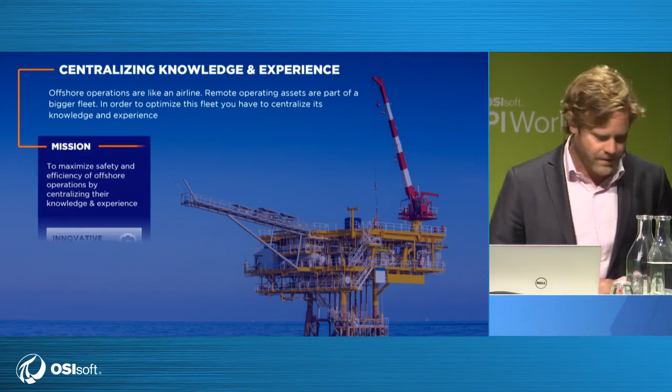A little bit about Rollos. My two other partners have a background in aerospace engineering, and Rollos is actually a family-owned business, third generation, so it's 70 years old.

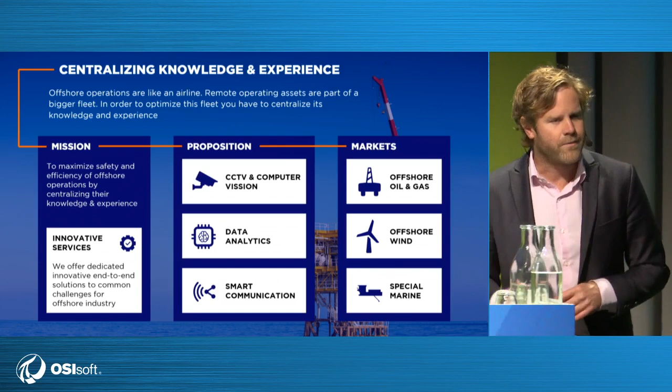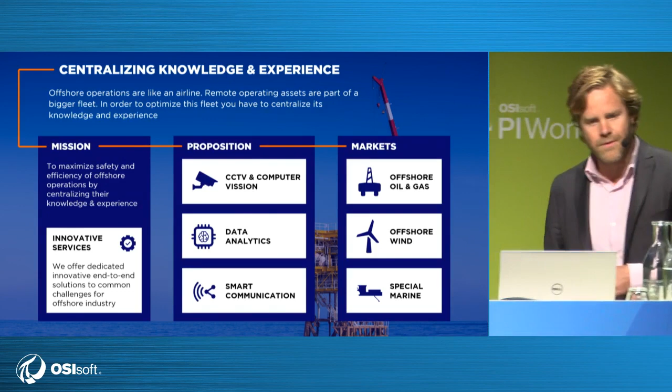And we acquired the company 4 years ago with the intent of buying an installed base. So Rollos traditionally provided CCTV camera systems to offshore drilling contractors. Now, instead of having a startup and innovating in that kind of way with a new product, we bought the company to be able to innovate on top of existing customer relationships and issues that were coming directly from our clients.

So we've evolved into a company that helps people with remote assets manage their central storage and access to data. So we see it as like an airline fleet. If you own a lot of assets that go around, it could be ships, drill rigs, they don't have good data connections to shore. And what we do is all of our solutions are focused around giving an end-to-end solution to help customers actually centralize that knowledge and experience in one place.

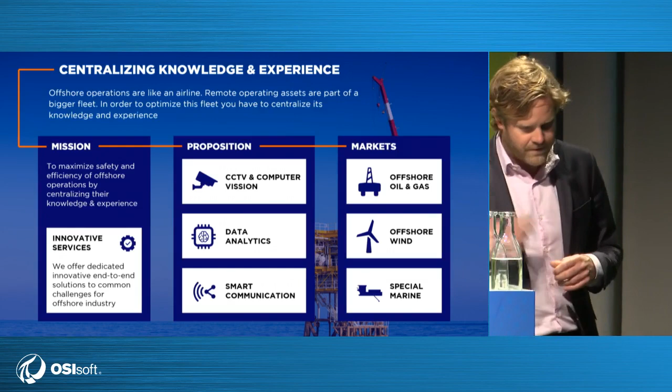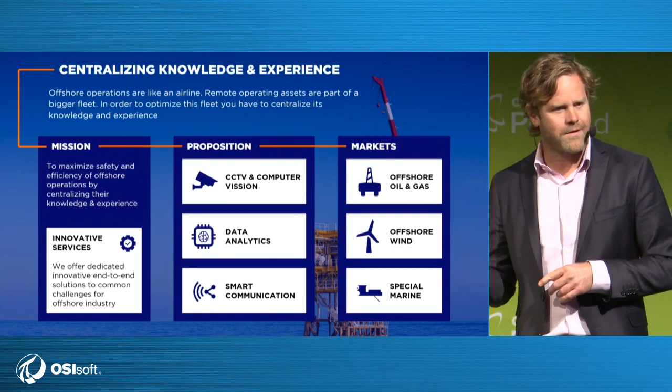So what we've done with the company is still do the CCTV, but for us the CCTV is no longer traditionally cameras, it is a smart sensor. So we add deep learning algorithms, real AI. It's not some simple algorithms, this is a full deep learning stack that can actually do smart things on top of video.

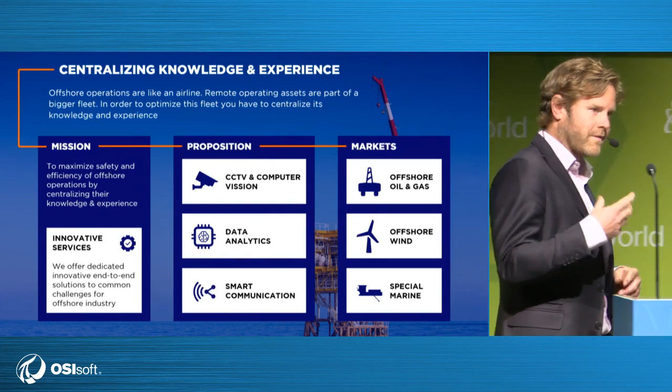And that's the main topic of the product that we're talking about today. That's the first core pillar. The second one is data analytics, and this is how we partner with Pi. We build custom data analytics solutions on top of Pi.

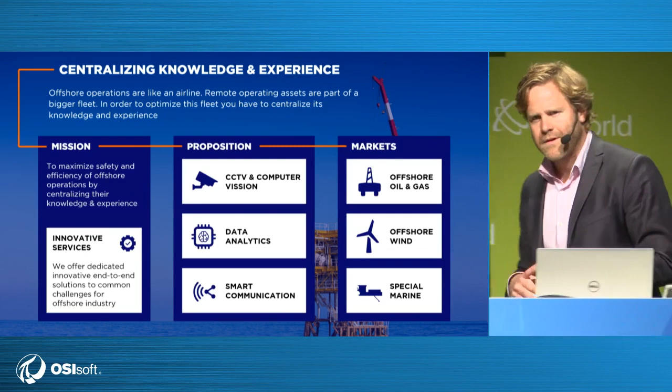So we also combine time series data with documentation. We have a tool that can actually take information from documents and manuals, and if an alert comes out on one of the Pi systems, we can actually tie into the maintenance management systems and have the most relevant documentation to that piece of equipment with the actual time series alerts.

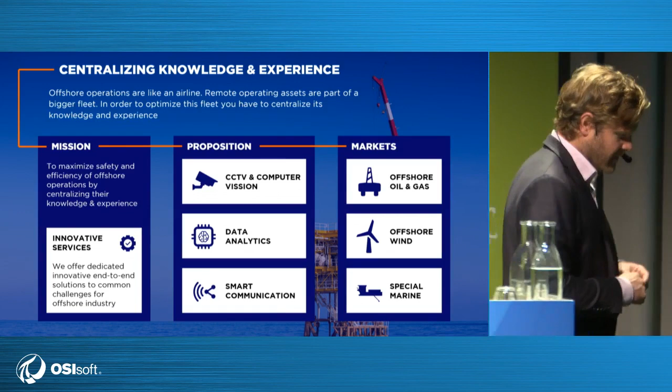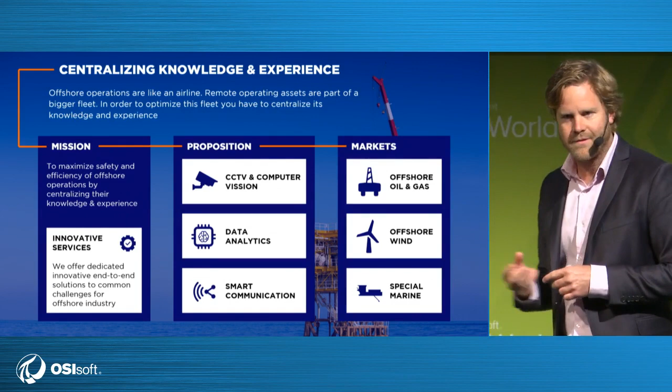And then the last one is, in order to make use of smart technologies, you need full connectivity. Now, on most offshore locations, especially non-new build rigs and vessels, there's no full Wi-Fi. And if you want to put full Wi-Fi on your platform, there's a lot of steel, and it really attenuates your signal from classical Wi-Fi.

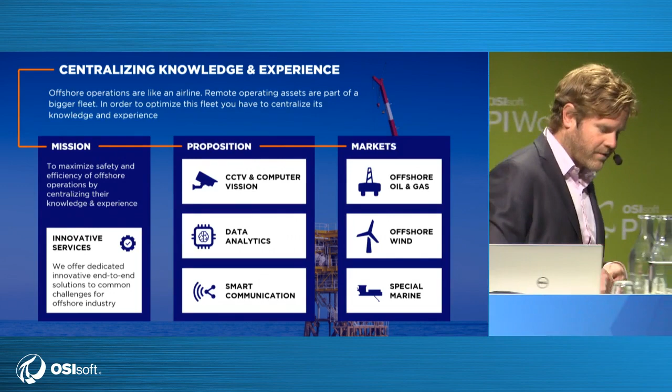So what we do is we set up our own private LTE network. So we've got like a Verizon in a box. We've got a mobile one that we can actually carry around, and we have a full setup for the rig.

And that allows us to tie the other smart solutions we do to really get the people to have that information at the asset, so in the thruster rooms or at the asset on the drill floor. And that's when these technical solutions actually start working, when everybody has access to them on every place of the site.

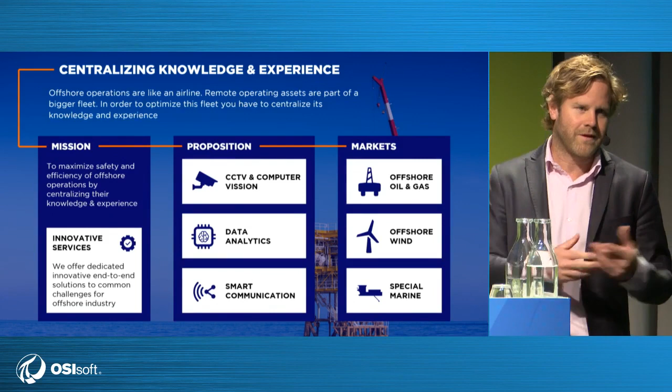We don't do this for all markets. We focus on offshore, oil and gas. Main customers are drilling contractors there, but we deal a lot with oil companies as well. And especially for this solution, we're seeing that drilling contractors and oil companies are actually teaming up to put a system like this in place.

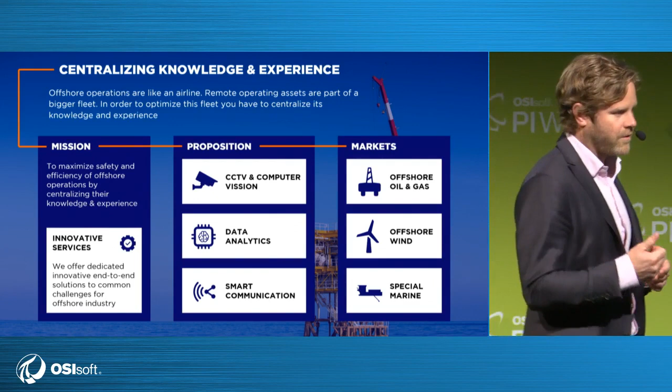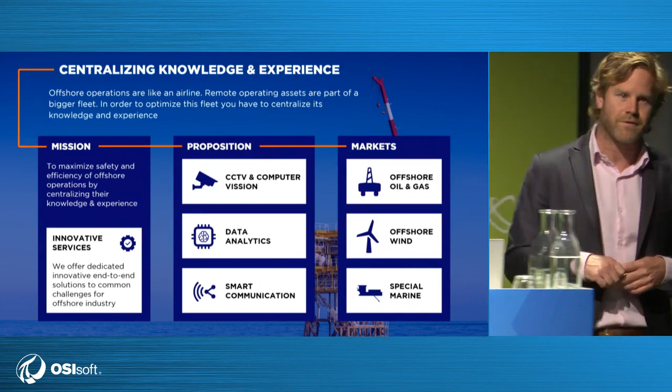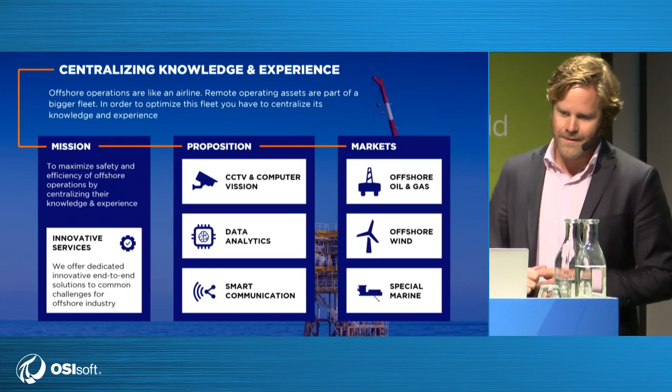We do this for offshore wind, mostly the substations that actually gather all the tie-ins of the electrical, and special marine. Special marine is very big in our country. We are based in Holland, in Rotterdam, close to the harbor. And these are companies like the lifting companies, the Heerema's, the Allseas, the Huisman. It's very big in our company. We do the digitization for a shipbuilder in the Netherlands called IHC. So these are our three market areas.

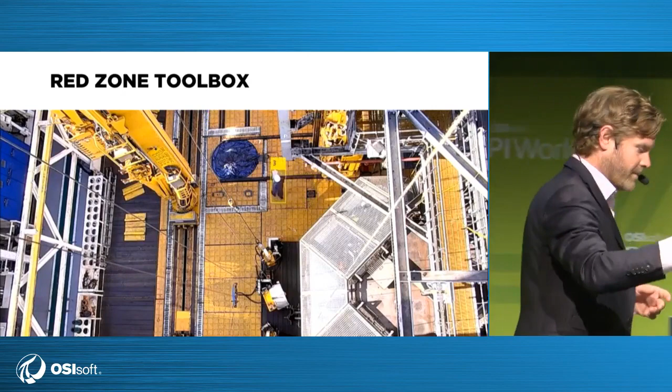What happened is the system that keeps these drill pipes in place is an open loop system. It's got valves that open and close, with no feedback to the person driving that big crane to tell him the latch is open. So there's people looking up and giving visual confirmation.

One of those latches failed, and when they started pulling out the pipe, it pulled through this latch, broke off, and hit somebody in this back area. Two things went wrong there: somebody missed the person, and he shouldn't have been there in the first place.

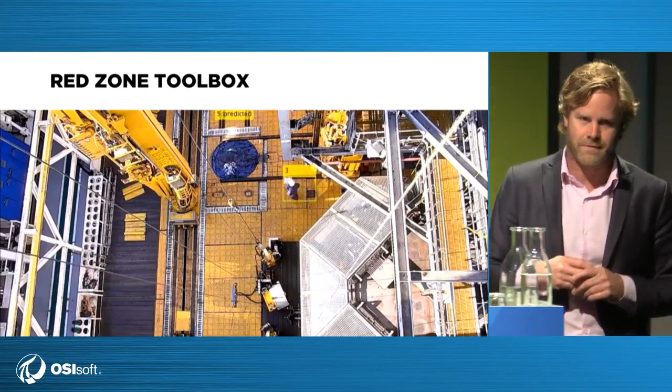So they asked us: we do not want to repeat this event ever again. Can you come up with a solution that can keep track of people on the drill floor and their position with respect to the equipment? This is one of the earliest versions.

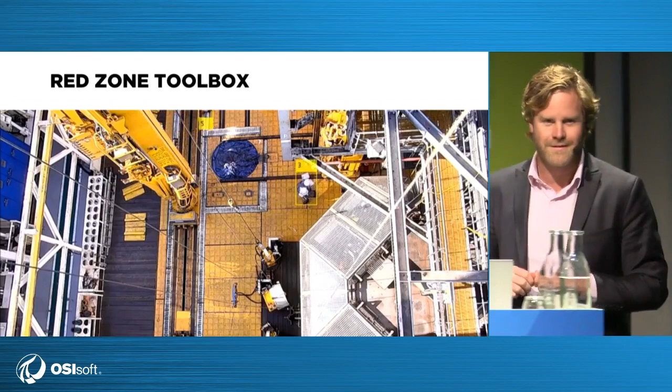We explored different approaches, like RFID tags and other spatially aware measurement technology. In the end, we found camera systems were the most robust. We have a lot of experience with them, so we could combine our knowledge of the industry, the camera systems, and data science to analyze this video in real time, because that's the hard part. This is one of the first tests we ran.

The drill floor is still by far the most dangerous place on the drill rig, period. The difficult part is that it's a dynamic environment. You'd preferably have no people on there, and we're getting there with rigs that are fully autonomous with automated stop systems, but we're not there yet. There's a whole fleet of older rigs still operational that require people in an area where heavy moving equipment moves around.

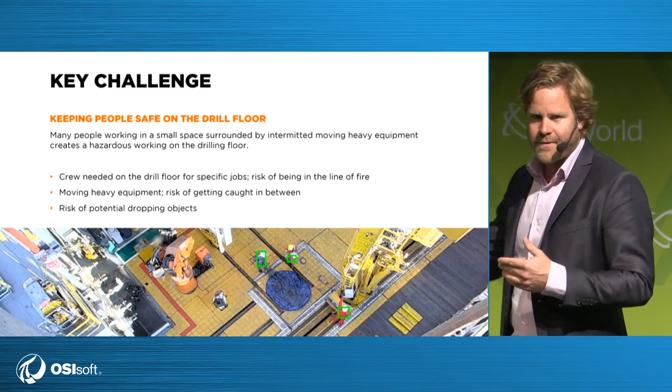There are three major risks. Being in the line of fire of something very heavy. Getting caught in between something, a hand gets stuck somewhere. And there's a big drill tower on top of the rig with a lot of heavy equipment, so there's potential for things dropping down. If something even a kilo in weight drops from 20 to 25 meters, it's lethal.

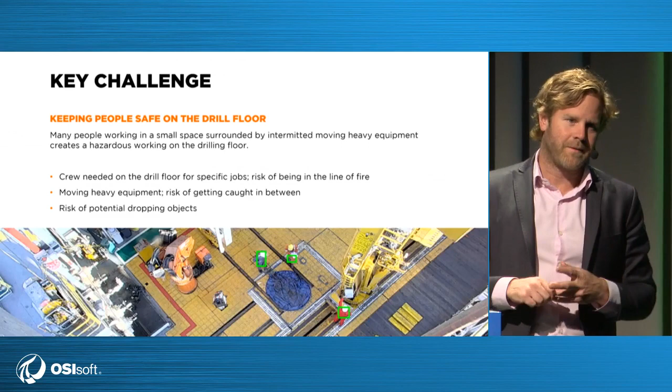So that's the issue. What we need is a system that gives the driller continuous awareness of where his people are without human interference, because if you have somebody doing a tedious task and relying on visual checks, mistakes happen.

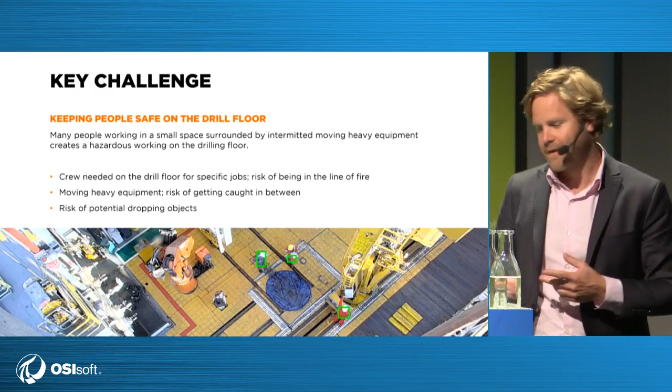So we started with the main goal: detect people, locate them, and send alarms and alerts to the people who needed them to know where people were. Those are actually the top two priorities.

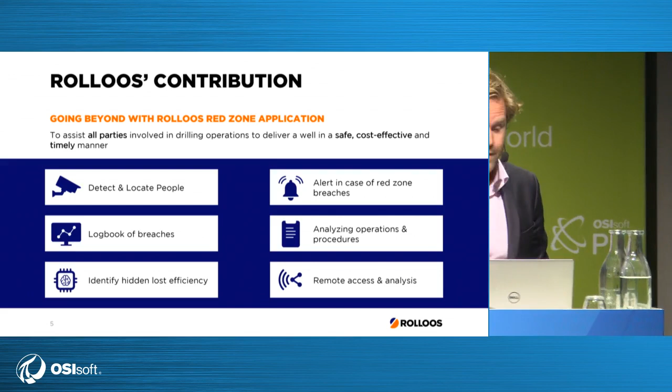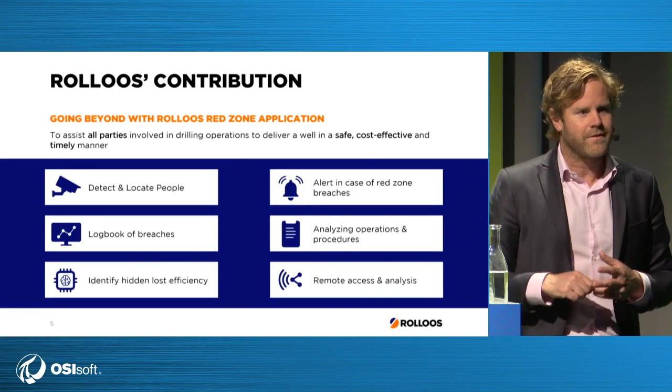As we developed the product, we started gathering more and more data—people data, location data—which gave us the capability to start analyzing the way we work. If you don't measure something, you don't really think about how your operation goes. There are standard operating procedures, but because it's really hard to measure how people move on the drill floor, you don't really have a fixed way of thinking about it.

With some of our clients, we realized they didn't really know how to define which areas were risky and which weren't. So we started doing an analysis of the procedures they have.

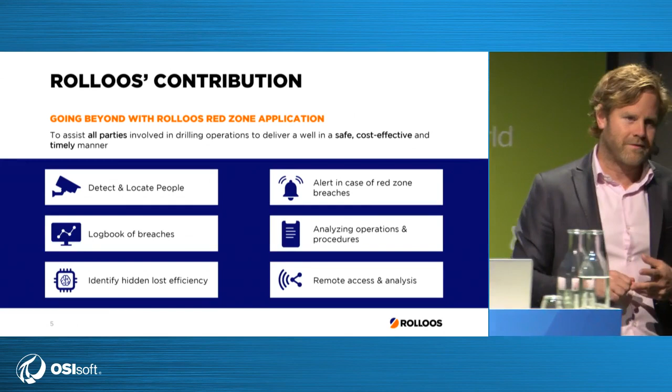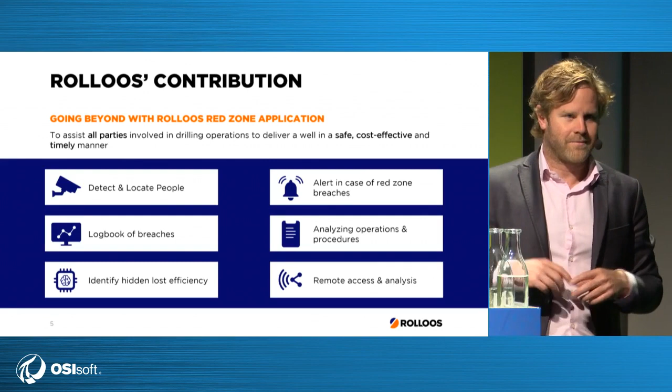Now that we have all this information, we can combine it with some of the equipment outputs. A lot of drilling contractors are also getting onto time series data, tracking how they perform with their crews. We can now add the human element to that, because we can track it from video and combine that with the equipment data output to improve efficiency even more.

And then we can stream that data back to shore using the Edge Data Store.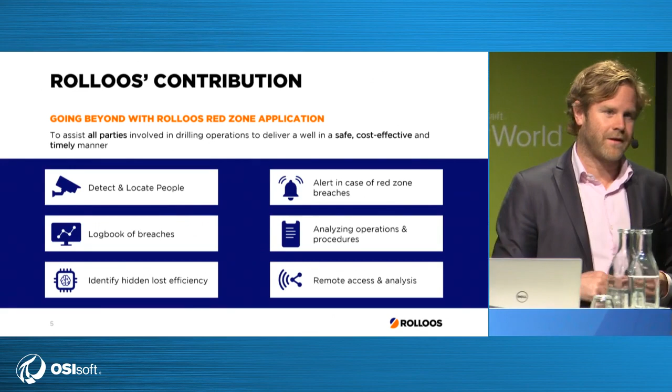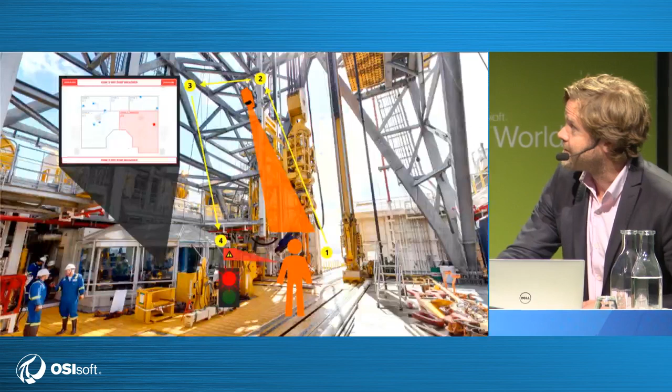So we'll focus on the alerting part here first. How does the system work? This is a large drill floor, and we've actually put several cameras up.

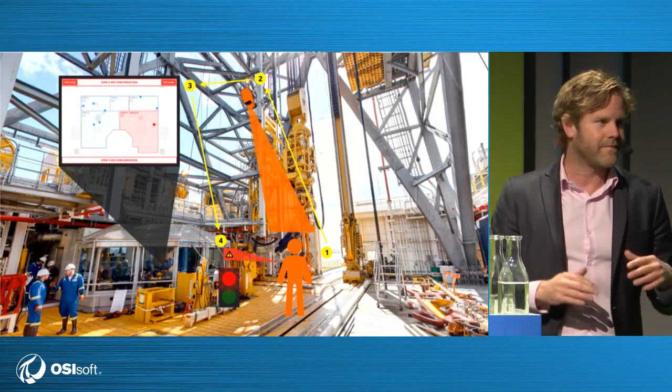One of the hard things people had tried before is putting cameras at eyesight level. If you do that, when people are standing in line of each other, it's really hard for a vision-based system to pinpoint where that person's been. And that's the key thing—we need to do that with high accuracy. We need to know exactly. So that fails when you put the cameras like this.

So we went back to the drawing board.

One of the advantages of doing it at eyesight is there's many algorithms out there that can easily detect the person's front face. Google, Facebook, all these, you can get open source libraries, it all works. But the triangulation part was really failing.

So we went back to the drawing board and figured, okay, what do we need to do? We need to pull the cameras up, so we're putting the cameras at 10 meters above the drill floor. That makes it harder to detect people at first, so we had to really retrain the standard-based algorithms. But once we got that, it's actually very robust and it works really well.

So we've got 16 cameras on top. Then the driller has a very simple user interface. These guys are already overloaded with 10, 20 screens, they have to look at everything. So when we first said we were going to introduce an additional screen, they said, no, not another one, not another alert.

So we really sat with them and talked through, okay, what would be the least intrusive for your work? So we've got a very easy touch-based system where we predefine the zones that we consider to be red zones during which operations. Then the driller can either use the touch screen to activate that zone, and then the operation starts. And as soon as somebody moves in and there's a breach, an alert will go.

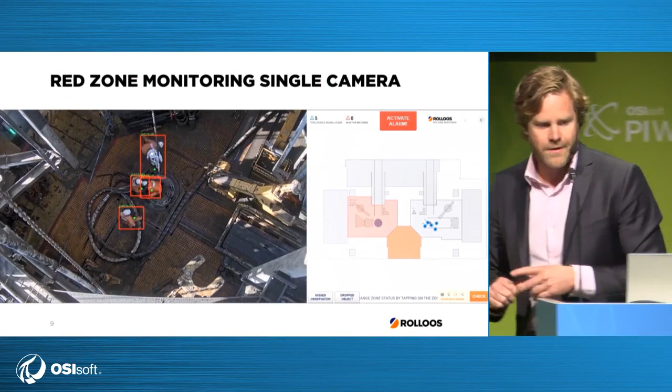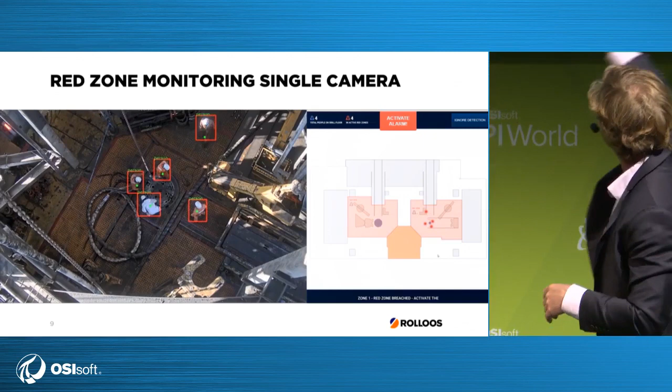So this is actually the system at work. The driller never sees this video on the left-hand side, it's just for explanation purposes. What he does see is actually the screen on the right. And he's just pressed to start activating it. There's a stoplight sign on the left-hand corner, which starts flashing that it's actually being activated.

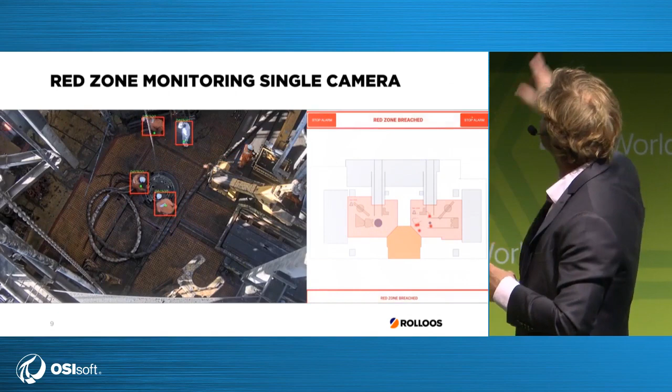And as soon as somebody now moves into the zone, it actually starts breaching it. So he gets an alert. It's very simple, and I like that, because everything behind this is true AI, right? It's some serious computational calculations going on in the background.

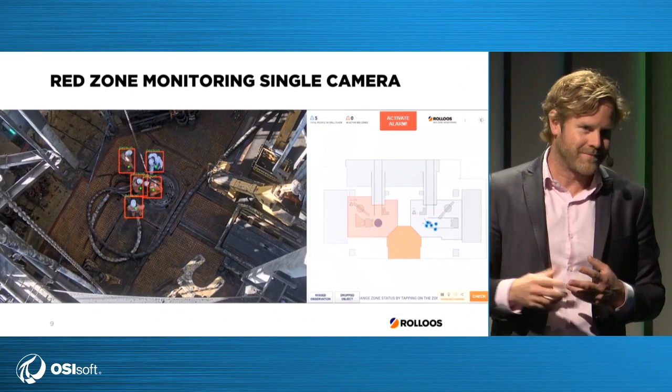But the end result is very simple. You just need to make AI work to do what it does for you, and then don't focus all the technical details behind it. That's the way I see this technology applied.

So on the left-hand side, you see a screen where we're only identifying people, that was what we started with. We can now also identify the equipment. But the disadvantage we have is that we actually lose sight of the equipment as soon as it goes out of our camera image. So we needed integration with the control system.

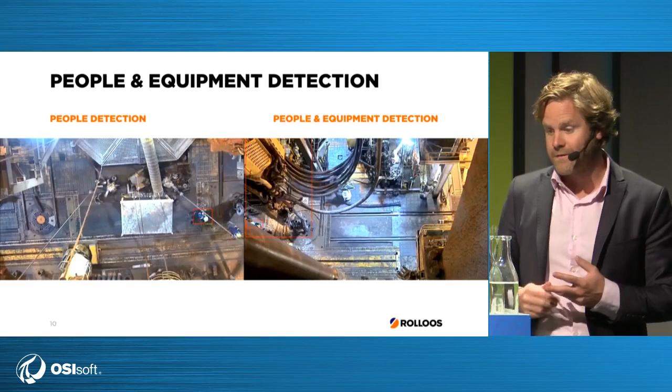And we also need the integration for the control system to automatically start activating which zones are red zones and which aren't. So we need access to the control systems. Now, we do this with the classical ways, the OPC interfaces, the Modbus interfaces. And what we were looking for is a piece of technology that could help us out there.

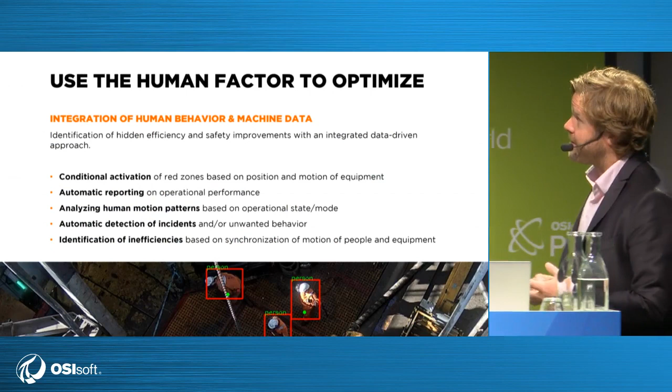So what we can do from having the combination of the equipment data and the people position data is we can, like I said, control activation, but we can also start doing really fancy reports on the performance of people and their safety behavior. And we can start analyzing movement.

We can do heat maps. We can see, hey, maybe this operation isn't so optimal. Somebody is continuously standing in a dangerous spot, and then when you go to the drill floor, you see maybe somebody put a piece of equipment there that's not really rightly placed.

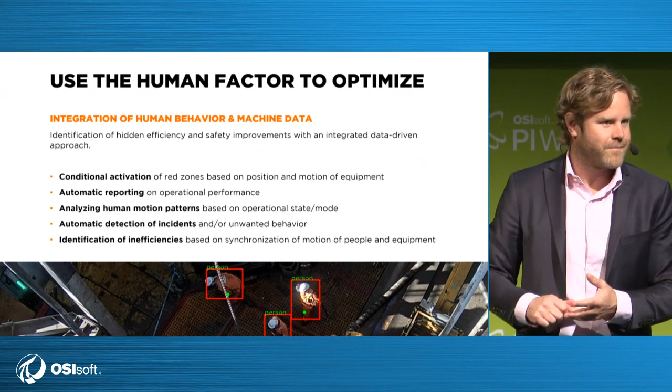So that's one of the extra things we can do, and we can start identifying incidents. Somebody touched the tool, or what's the operation they're actually doing. The algorithms are getting so smart that we can actually say, oh, during this period they were changing out a bit. So we're starting to add segmentation to the scenes, not just people detection, but we're actually doing, say, what are you doing at the moment? And then you can make an event frame during which period they were doing that.

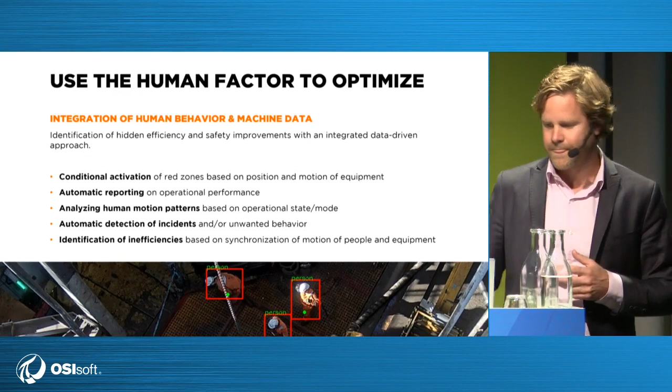So that's where the Edge Data Store comes in. We started talking with OSIsoft, and since we sell OSIsoft to our customers, we thought we need to eat our own dog food. So that's where we started to incorporate this PI technology into our product.

A PI Server was just too much - we don't need that many tags. We needed something that was microservice based, and we needed to be sure that we could get any protocol in.

Edge Data Store comes with a couple of connectors. At the current moment it's Modbus and OPC UA, which is fine, but we also want the capabilities to stream in IoT type sensors. If we need to combine that to make our solution smarter, we have OMF, the OSIsoft Message Format, to actually pull in protocols that are non-standard.

It's fully scripted, so our entire backend - I have an architecture slide next - we run everything in microservices, so we can spin up what we need in our architecture when we need it. The EDS has this functionality that you can fully script it. It's less user friendly, but when you want to build something maintainable on a rig, it's actually really helpful that you can script all configurations.

It supports Docker, any OS, so we don't need to worry about Linux or Windows. If we want to run it in another environment, we don't have to think about that because we know it allows you to do that.

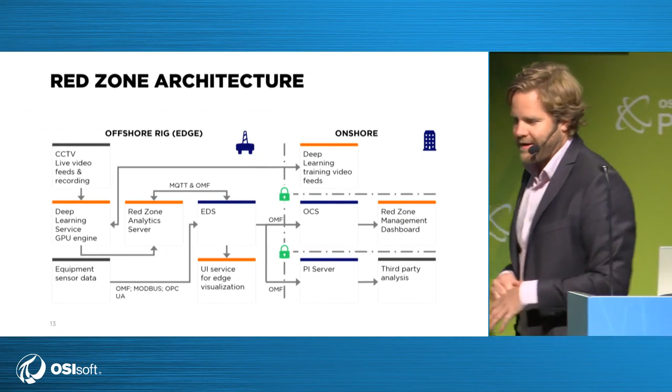So where we started out making a solution that just did a safety system for drilling rigs, red zone management has now turned into a complete platform. It consists of several components - we have a full CCTV system with a video management system and storage.

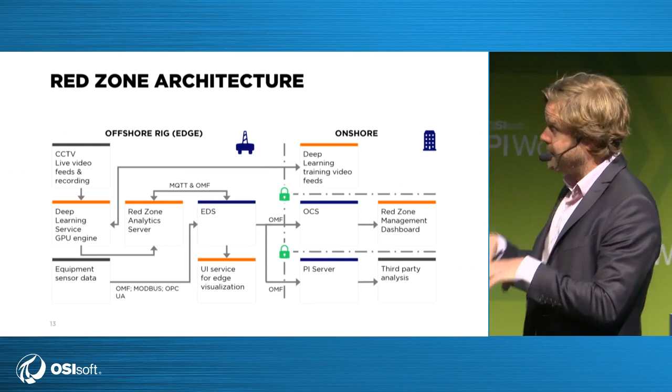It's a separate block that we can use. Then there's a deep learning server - a pretty hefty beast going out with GPUs.

There's several reasons to actually compute on Edge, because when it comes to video data and having low latency, we do 500 milliseconds from the algorithms picking up the data on the cameras and feeding it back into the driller. If you go out into the market and check which deep learning algorithms actually work that fast, there's only a few.

So we have a server there that can do vision-based analytics with a framework. The advantage we have now is that we can add an additional camera - we have all the storage.

If we want to do a new application, say we want to start analyzing data from an ROV to detect something with a pipe underneath the water, we can take the recordings, offload them from the rig, and train the algorithm in a shore-based situation where you have more compute power. Once the algorithm is trained, the heavy lifting has been done.

The training is the hardest part to do with deep learning. So we take those recordings, train the algorithm on shore, and then all we push back is the configuration of the deep learning algorithm, and it can run on Edge. So you've created a platform for vision-based analytics.

Then our full backend speaks MQTT, so we have like a universal protocol, and we use OMF to push it into EDS from our outputs. We can use the standard interfacing to connect to the drilling control system so we have it in one place. We have a couple of endpoints, so we can code our UI against EDS - it will call and have our visualizations run on the Edge Data Store.

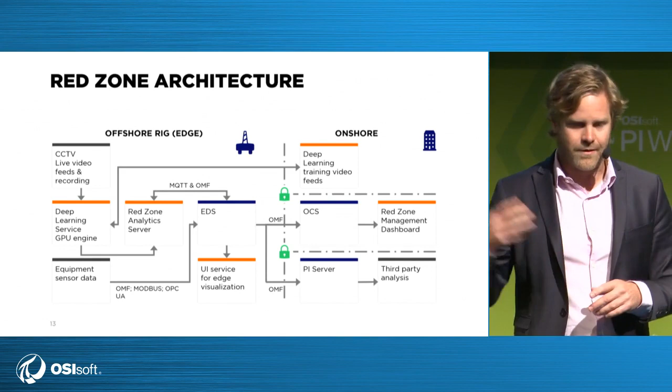And then we can feed it out through OMF to either a PI Server, and that PI Server can be connected to maybe a PI Server of one of our clients, through Cloud Connect or a third-party application. Because we've opened up the data coming from our systems to everybody, it's not a closed system - we're sharing in and out. So if we want to build smarter things, we can do that.

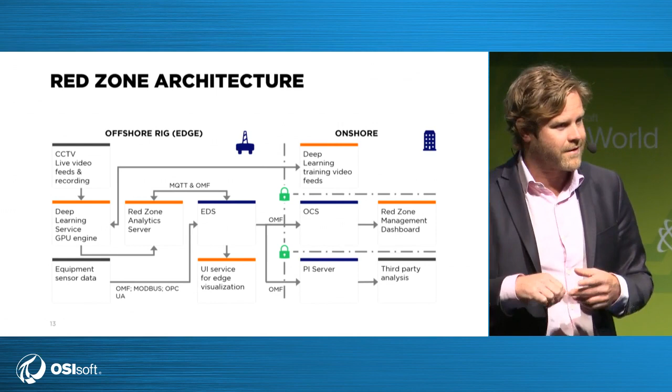We can feed it out to OCS, and then we have our user interface, like a central management dashboard for all the rigs. And like I said, we have the capabilities to feed off the videos.

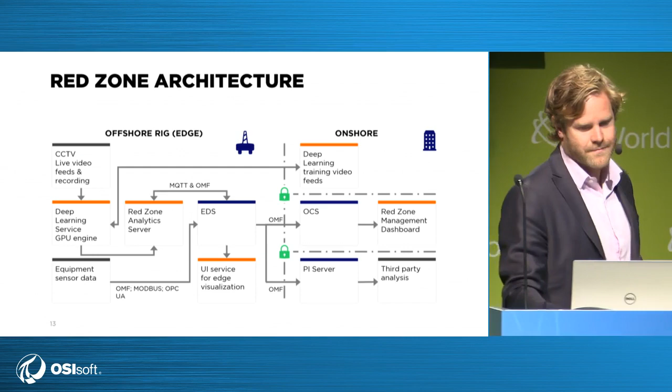And now this is an example of our most recent dashboard. It probably looks like, if you're not in drilling, a bit abracadabra, but what we can now do is really start benchmarking things. We can see how many red zone breaches have occurred during which shifts. We can start actually analyzing the behavior.

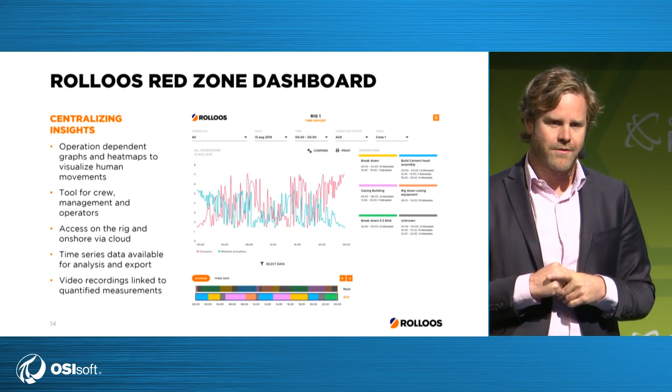There are three key stakeholders really interested in this type of statistics: the drill crews, to improve their performance and safety records; the end customers, who want a record of the safety behavior on board; and the safety reps, who actually love this because they can change their operations and try to make them more safe.

But now you have a tool that can actually measure if it's improved, because we can see how people have been behaving, and then the next month, once you've made a change because you thought the operating procedure was slightly suboptimal, you have the capability to measure it, and if it doesn't change, you can act on it. So we could do per shift, per rig type, maybe based on different equipment. It's really given us much more than just an alerting system for keeping people safe on the drill floor.

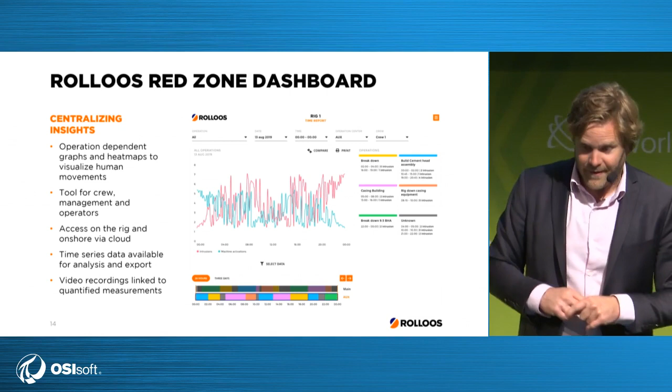So I think I've been a bit quick, but that's me. If there's questions on either how we worked with the development teams, because maybe that's something I haven't mentioned - it's been great working with Chris Veld's team, and the lines are really short. There's a lot of iteration cycles, but we've really enjoyed working with the development teams directly, and I can encourage anybody that wants to try out these new things that it's really nice to work with the teams. So thanks for your attention. Any questions?

Thank you so much. I wanted to just ask how you transfer the video and audio data. Are you doing edge processing, for example, just transforming it into a vector and transferring the vector, or the entire video to the cloud? No, we don't go to...

We only go cloud for new applications. Actually, we've got quite a few servers ourselves for the training, because it becomes quite costly in the cloud easily. So everything runs self-sufficient on the rig, but if we need to transfer vast amounts of video data - for the red zone system, everything stays on the rig, everything. It's full edge. If we want to, in the example where I said I want to train a new application, we would probably still offload with disks, because it's gigabytes and gigabytes of data.

So we can take it from the video management system, then we upload it into our systems onshore. We retrain the algorithms to do something new, and then the only thing that goes back is the weight of the deep learning model. And then we know we have the right recordings, the right latency, we know the pixels, we know everything, because our video management system is controlled by us. And then you press play, and you've got the new deep learning.